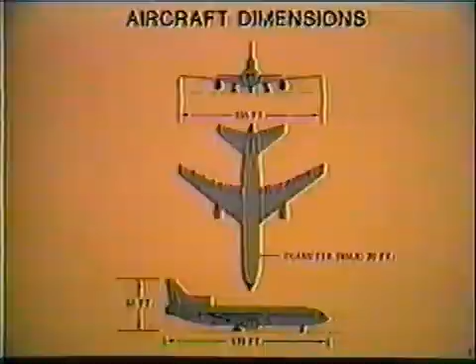The minimum pavement width for a 180-degree turn is 142 feet. This assumes the turn is being initiated with the airplane in motion at approximately idle thrust and no differential braking.

It should be noted that the wingtip turning radius is larger than the nose turning radius. Therefore, nose clearance does not ensure wingtip clearance. The tips of the wings are not visible from the flight station.

Due to the high velocity of engine exhaust, consideration must be given to power application in the terminal or ramp areas. Gale force winds of 50 miles per hour exist as much as 100 feet behind an idling engine. This point for a wing-mounted engine would be approximately 20 feet aft of the aircraft tail. For this reason, it is recommended that breakaway power be derived from the wing engines.

At takeoff thrust, wind velocity of 100 miles per hour exists at 300 feet aft of the tail and decreases to approximately 35 miles per hour as far aft as 1,100 feet.

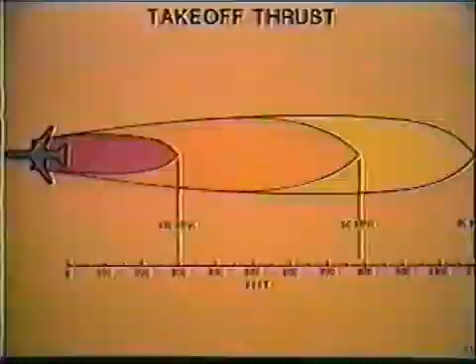The forward cargo compartment, the lower galley, the mid and aft cargo compartments are located in the area under the floor. The forward and mid cargo compartments are for containerized or bulk cargo. The aft cargo compartment is for bulk cargo and pets. All cargo compartments are Class D.

Located under the flight station is the forward avionics compartment, which is accessible in flight by a hatch in the flight station floor. The mid-avionics compartment is located in the center of the fuselage. It, too, is accessible in flight by a door located in the lower galley.

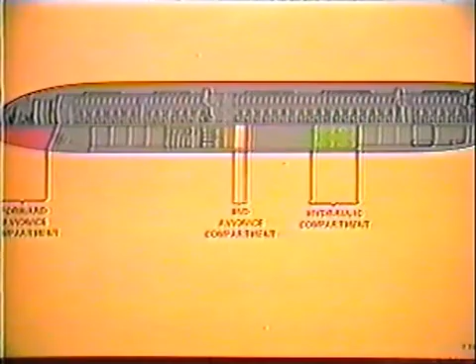The hydraulic compartment is located in the area between the main gear wheel wells. It is a non-pressurized area and is not accessible in flight. Access to the hydraulic compartment is through two doors on the underside of the fuselage.

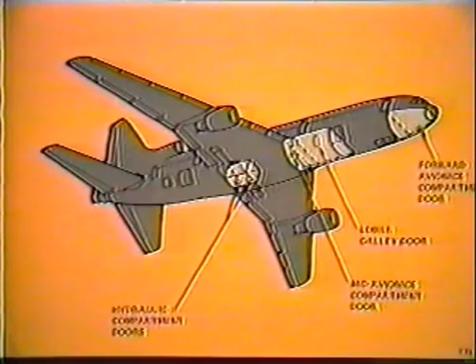The mid-avionics compartment external access door is under the right wing leading edge. The lower galley door is on the right side of the fuselage, forward of the right wing leading edge. The forward avionics compartment external access door is on the bottom of the fuselage, aft of the radome. This access door can only be opened from outside the aircraft.

All three cargo compartment access doors are on the right side of the aircraft. These doors are normally opened and closed electrically. If a cargo door actuator fails, the door may be manually cranked open or closed by use of a hand crank, stowed in the forward avionics compartment.

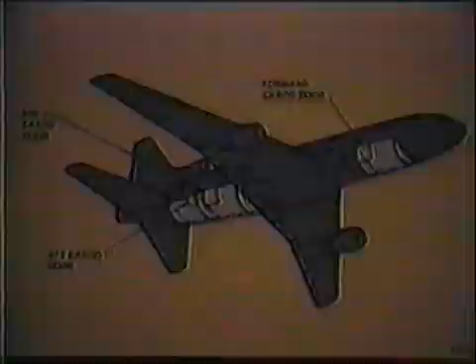Passenger doors are identified as 1 through 4, left and right. For example, the L1 door is the forward left entry door. The first 3 doors on each side are double-width entry doors. The L4 and R4 doors are single-width emergency doors only. They are all plug-type doors.

Flight station. The flight station is arranged in the conventional manner for a crew of 3 with 2 observers.

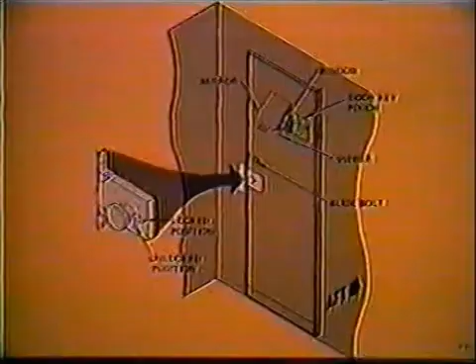The flight station door contains a window that is normally covered by a hinged mirror on the flight station side. Next to the mirror is a key pouch for the flight station door key. Below the mirror is a wide-angle viewer used to scan the cabin aft of the door.

A slide bolt is located above the doorknob for positive securing. The doorknob has a key lock on the cabin side and a manual lock lever on the flight station side. The manual lock lever prevents the knob from turning.

The door frame contains a lock plate that houses a solenoid-operated door latch release and a mechanical lock lever. The flight station door is normally held in the locked position by the energized solenoid. When the solenoid is de-energized, the door latch is released, allowing the door to open. The mechanical lock lever, when moved to the locked position, prevents the door latch from releasing.

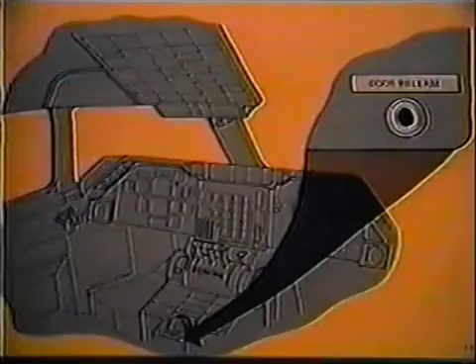On the aft right corner of the console is the momentary door release button, which de-energizes the solenoid, allowing the door to open.

Seats for 2 observers are provided in the flight station. The first observer's seat is elevated to provide the occupant with an over-the-shoulder view of pilot activity. Under his seat is stowage space for crew luggage with a retainer strap. Behind the seat is a coat closet.

The second observer's seat, adjacent to the entry door, has a folding seat bottom that stows when not in use. On the floor in front of the flight station door is a hatch which provides access to the forward avionics compartment. Fastened to the bottom of this hatch is the MCO pouch.

On the right aft portion of the flight station is a coat closet and a hat shelf. The floor of the coat closet is not to be used for storage, so no retaining straps have been provided. Forward of the coat closet and to the right of the second officer station is a flight kit storage area with a retaining strap.

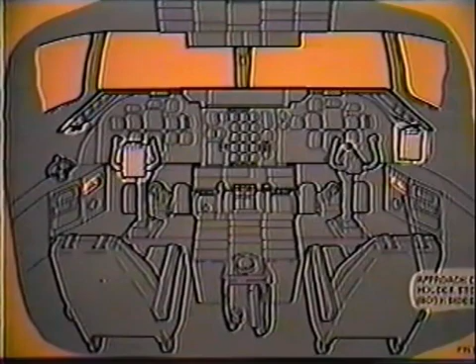Illuminated approach chart holders are stored in the side consoles and can be mounted either on the top of the control columns or on the side consoles.

An eye locator is provided to position the pilots for optimum visibility. With the pilot seat properly positioned, optimum runway visibility and an unobstructed view of the engine and flight instruments is assured. The pilot's eye locator is an illuminated two-way sight mounted below the compass on the windshield center post. The switch on the eyebrow panel controls the light in the eye locator. The eye locator will be demonstrated in the simulator.

With the pilot's position adjusted to the eye locator, forward visibility will be 28 degrees up and 21 degrees down. This means the first visible ground object will be 42 feet in front of the nose.

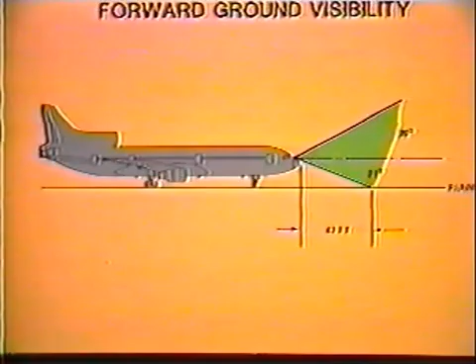On an ILS approach with a reported 1200 RVR at 100 feet, the first visible ground object will be 420 feet in front of the nose, resulting in 780 feet of ground visibility.

At touchdown, with a body angle of 8 degrees, the pilot's eye reference will be 32 feet above the ground. The nose wheel will be 10 feet off the ground, and the first visible ground object will be 130 feet in front of the nose.

During rollout and taxi, the pilot's eye reference is 19 feet above the ground and 22 feet forward of the nose gear. The nearest visible ground object will be 42 feet in front of the nose.

The captain and first officer seats operate identically. Vertical and longitudinal travel adjustments are normally electrically actuated. The same vertical and longitudinal adjustments have manual backup levers. 4 additional manual adjustments are provided: thigh adjustment, lumbar adjustment, recline adjustment, and the armrest adjustment. The seats will be demonstrated in the simulator.

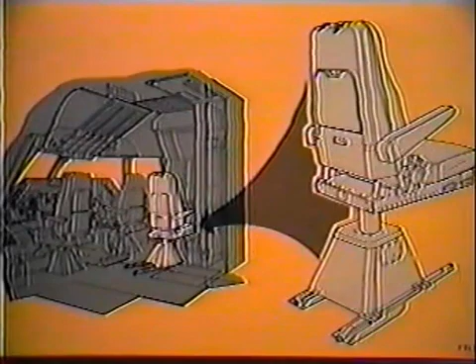The second officer's seat has manual controls and travels along the floor on diagonal tracks. The seat also swivels and has 5 stops. This seat will also be demonstrated in the simulator.

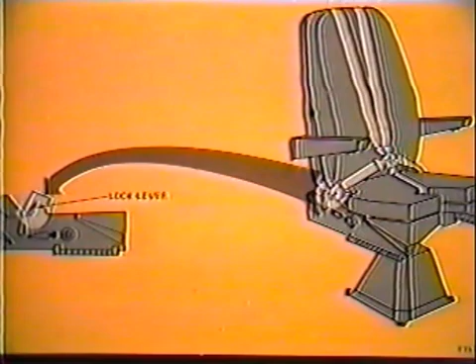All 3 crew member seats have the same restraint system. This consists of a dual shoulder harness with inertia reels, a lap belt with retractors that has lock levers to lock its position, and a crotch strap with retractor is also provided.

The circuit breaker panels are numbered from forward to aft. Circuit breaker panel 1 is over the pilots and is called CB1. Circuit breaker panel 2 is over the second officer and is called CB2. Circuit breaker panel 3 is to the right of the second officer's seat when he is facing the panel and is called CB3.

An alphanumeric grid reference is used to locate individual circuit breakers. Letters are along the right side of the panel, starting with A at the bottom. Numbers are along the bottom of the panel, from left to right, starting with 1. The circuit breaker panel number precedes the reference. For example, circuit breaker 1A7 would be circuit breaker panel 1, row A, column 7.

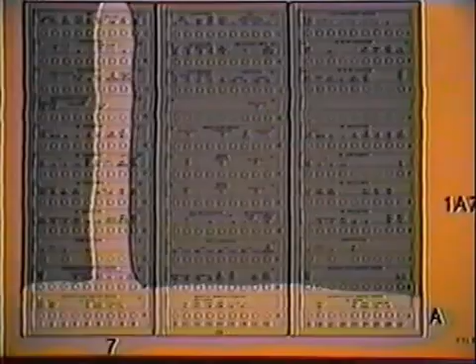Since circuit breaker panel 1 is within reach of both pilots, the left side contains the captain's flight instrument and avionics circuit breakers, and the right side contains the first officer's flight instrument and avionics circuit breakers. The center column contains circuit breakers pertinent to all 3 crew members.

Circuit breaker panel 2 contains those items less critical. The same alphanumeric grid reference is used to locate individual circuit breakers.

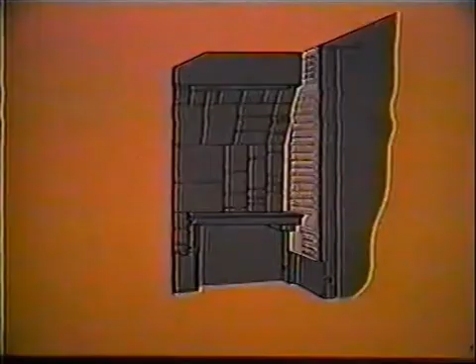Those items which must be readily accessible to the second officer are found on circuit breaker panel 3. Circuit breaker panel 3 also uses the alphanumeric grid reference system to locate individual circuit breakers.

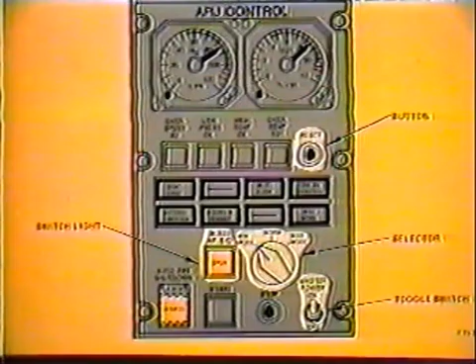Flight station panel switches. There are several different types of switches used on the L-1011. All of these different types can be seen on the APU panel. These types are button, selector, toggle switch, and switch light. The switch light may be new to you, so it will be explained.

A switch light assembly consists of a switch with a lens cap. The lens cap may display a maximum of 2 legends. The message may be either a word, a flow bar, or an in-transit indicator. A chrome bezel distinguishes a switch. A switch may be of the momentary or latching type. A black bezel distinguishes an indicator only. An indicator has no switch function.

Spare lamps are located in a drawer under the second officer's work table.

Two panels have guarded switches with cautions that must be observed when relamping. The cautions read, "Do not relamp with power on," or "Pull CB 1B14 before relamping."

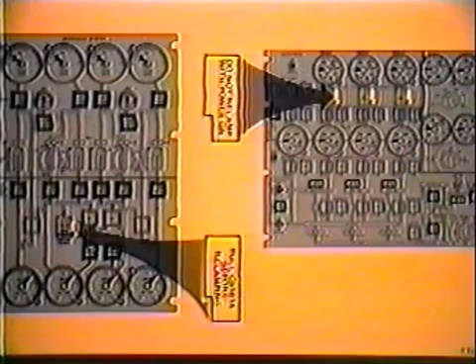When a malfunction occurs that is outside the normal vision of the pilot, a light on the pilot's annunciator panel will flash for 10 seconds, then remain on steady until the fault is corrected. The light from a fault not corrected can be extinguished by pressing the reset button.

An exception to this is the green Engine 2 fail-armed light. It is green because it is a normal condition not requiring crew action. It does not flash and will not reset.

The Warning Caution Advisory Light's test switch serves two functions. One is to test all the forward and overhead panel lights and the pilot's annunciator lights.

The second function is to recall any light on the pilot's annunciator panel which has previously reset and for which the fault has not been corrected. This light's test will automatically be terminated at the end of 5 minutes to protect the lights from overheating.

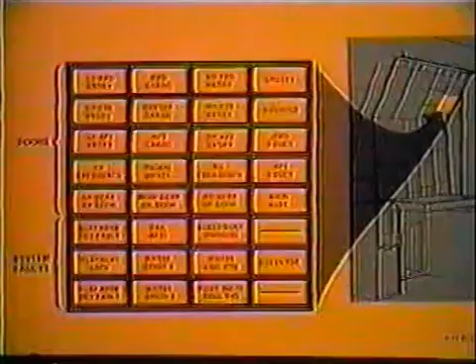The second officer's annunciators are somewhat different from the pilot's in that when activated, these lights illuminate steady and will remain illuminated until the associated door is closed and locked, or the affected system fault is cleared.

The upper portion of the second officer's annunciator panel indicates door lock status. The lower portion indicates system faults.

There are a number of aural warnings. Each of these warnings will be covered in their respective sections later in the program.

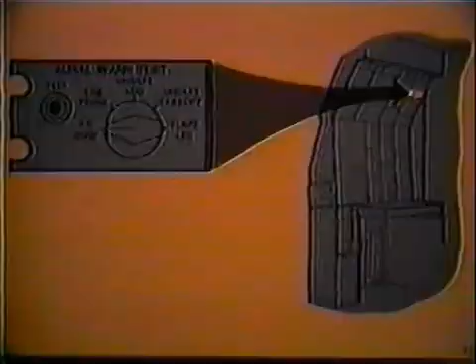An aural warning test panel, located at the second officer's panel, permits testing of certain aural warning sounds. It does not test the system or equipment. When the test button is pressed and held, it will sound the aural warning for the system selected.

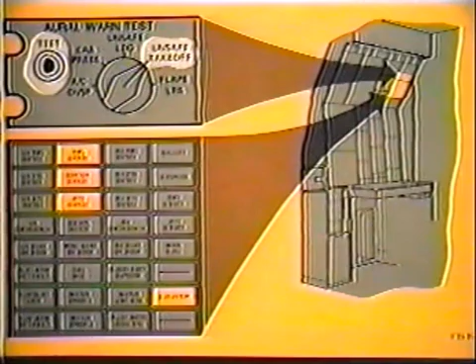The unsafe takeoff position is unique, since it also tests the cargo door open and elevator light circuits for integrity. When selected to unsafe takeoff, pressing the test button will cause the 3 cargo door open lights to illuminate, the elevator light to illuminate, and the unsafe takeoff aural warning to sound.

This confirms the system's ability to annunciate if a cargo door was unlocked or open, or if an elevator is jammed. The aural warning sounds as a result of the test only, and will not sound with an actual cargo door open condition. The aural warning will sound with an actual unsafe takeoff condition.

The aircraft has 3 categories of aircraft lighting. Normal interior and exterior lighting is powered from the main aircraft load buses. Instrument standby lighting is powered from the standby bus.

Cabin and cockpit emergency lighting is powered by separate battery packs located throughout the cabin and galley.

The captain and first officer's glare shield, utility, instrument, and floodlight controls are at each side of their instrument panel. The center console backlighting and engine instrument panel lighting controls are located below the parking brake knob. The individual cockpit lighting controls will be demonstrated in the simulator.

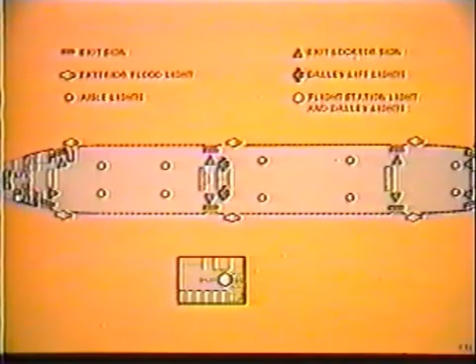Exterior lights. The exterior lights panel is located on the eyebrow panel and contains all the controls for the exterior lights.

There are 8 position lights installed on the wingtips, 4 on each side. The aft position lights are white. The 2 left position lights are red, and the 2 right position lights are green. When the position light switch is latched, 6 of the 8 position lights are illuminated.

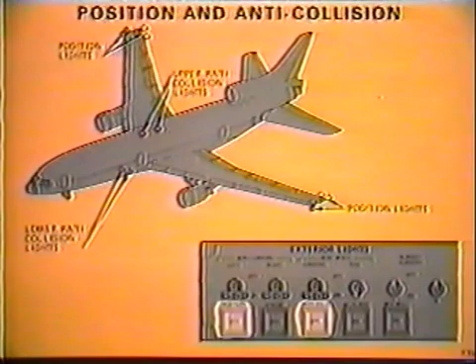The remaining upper red and green position lights will be illuminated when the anti-collision switch is latched. 2 anti-collision lights are located on the top of the fuselage and 2 on the bottom. Strobe lights are located on the leading and trailing edges of each wingtip.

1 fixed position landing light is installed in the leading edge of each wing fuselage fillet. There are 2 fixed position lights on the nose gear that serve as high-intensity landing lights and lower-intensity taxi lights. Runway turn-off lights for side vision are also installed in the wing fuselage fillet directly above the landing lights.

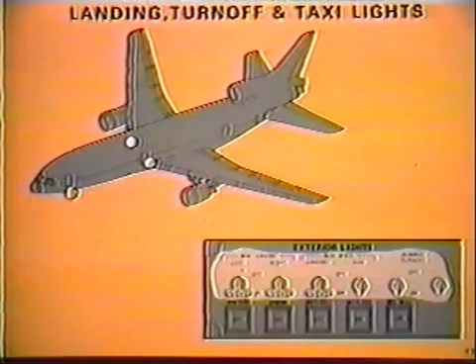Wing floodlights are placed on each forward side of the fuselage to illuminate the wing leading edge and engine areas. Wheel well lights are located at each main landing gear and the nose gear.

Let's take a quick look at the passenger cabin. 2 aisles run the full length of the cabin and are intersected by 4 cross aisles, 1 at each door.

Flight attendant control panels are located at the L1 and L4 doors. They contain the lighting, PA, entertainment, and electrical controls for the cabin.

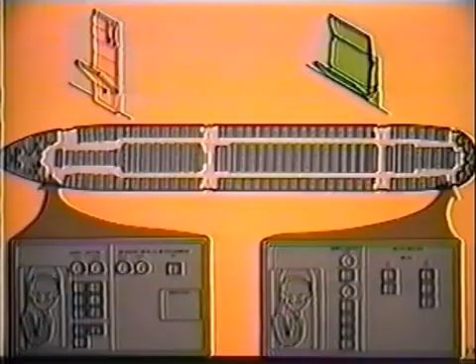There are 7 lavatories, 2 forward and 5 aft in the passenger cabin. In the center of the cabin is the upper galley, shown in amber.

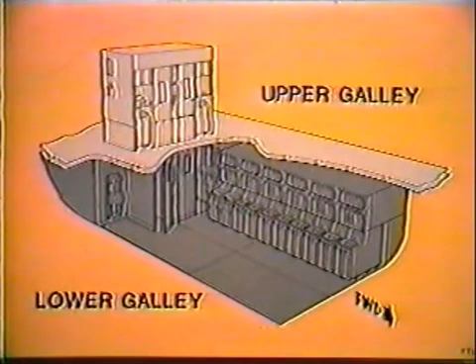The upper galley contains 2 lifts for access between the upper and lower galley. The lower galley is complete with refrigerators, ovens, and storage facilities for all meal and beverage carts.

This is a view of the lower galley looking aft. Above each folding attendant seat is a galley circuit breaker panel.

Items found on these panels are basically for cabin and galley equipment. The seat on the left lifts up, providing in-flight access to the mid-avionics compartment.

Two galley lifts provide accessibility between the lower and upper galleys. They are fully independent and may be operated simultaneously. Each lift may transport either one service cart or one attendant in either direction.

Internal controls are provided inside each lift. The external directional control switches are located on panels between the enclosures at both the upper and lower galley levels.

The upper galley control panel has a key switch to power both lifts, power either one, or remove all power. The key is located in the upper galley storage compartment.

To operate the lift from the inside of the lift, make sure the lift door is shut and latched. Place both hands, one on each assist handle. Place thumbs on the toggle switches above each handle and press and hold both switches simultaneously in the desired direction until the lift comes to a complete stop.

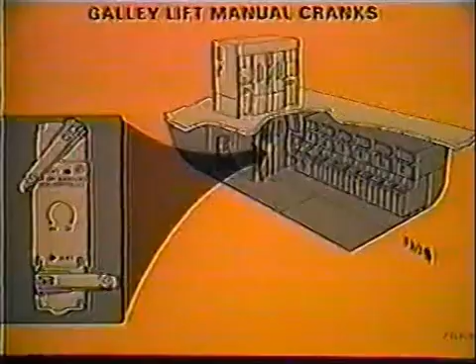Hand cranks are located below the lower galley lift control panel to provide a manual means of raising or lowering the lifts.

Waste system. The wastewater panel is located on the second officer's lower instrument panel. It contains the waste pump indicator lights. The wastewater panel also contains the drain mast heater switches, which will be discussed in the ice and rain protection section.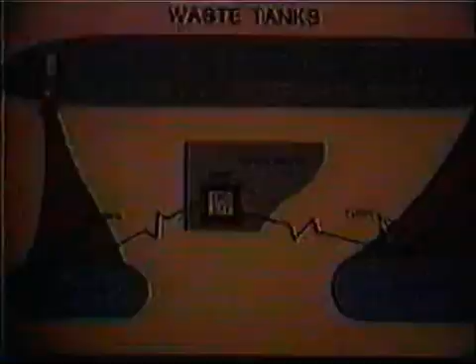There are 2 toilet waste tank systems. The forward system provides waste holding and flushing capabilities for the 2 forward toilets. The aft system also provides waste holding and flushing for the 5 aft toilets and consequently has a larger storage tank. Except for the tank capacity, the systems are identical.

Each system has 3 flushing pumps, which alternately respond to flush signals. If a pump should fail to flush a toilet when signaled, the controller will drop that pump from its sequence and illuminate the appropriate forward or aft wastewater pump light. The next pump in sequence, if available, will be signaled to operate.

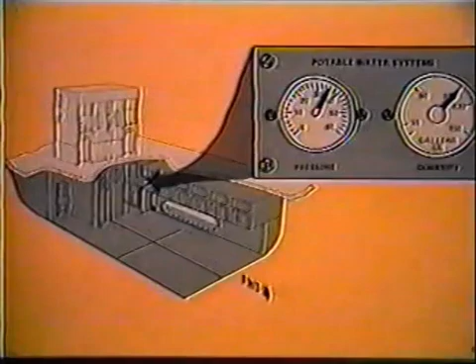Water system. A 150-gallon water tank is located outboard of the lower galley on the left side. When fully serviced, the tank will contain 100 gallons of water. The remaining 50-gallon volume is used for charge air pressure.

2 air compressors pressurize the tank to approximately 35 psi. Both pressure and quantity are indicated on the potable water system panel located next to the lower galley sink.

Two compressors pressurize the water tank. Water then flows forward and aft through individual shutoff valves located directly under the water tank. Additional water shutoff valves are located in the galley lift shaft and at each service center and lavatory. If either water compressor fails, the remaining compressor will continue to pressurize the tank.

The water distribution lines are protected from freezing by dual-element water line heaters in the unheated areas. If one of the heater elements in the water line heaters fail, the other heater element will continue to provide adequate heat.

Lights associated with the water system are the 2 water compressor lights and the water line heater light on the second officer's annunciator panel. If either water compressor fails, its respective legend will illuminate. If one of the dual-element water line heaters fail, the water line heater light will illuminate.

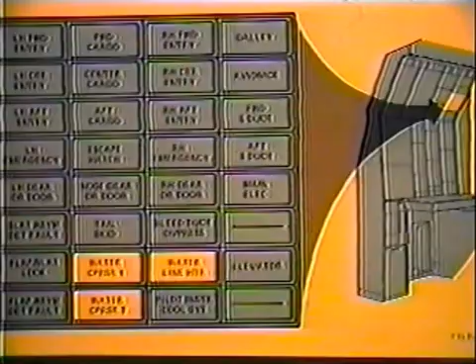The L1011-500 differences will be taught following each subject in which differences do occur. -100, -200 differences for ship number 724 will also be covered when necessary. If nothing is said at the end of a subject, assume both types of airplane, the -100, -200, and the -500, to be the same as the basic -1 airplane.

-500 airplane general differences.

The maximum weights for ship 724 when it is being operated as a -100 airplane are: taxi, 468,000 pounds; takeoff, 466,000 pounds, international operations; 430,000 pounds for domestic operations; landing, 368,000 pounds; zero fuel, 338,000 pounds, subject to certain conditions found in the limitations section of the pilot's operating manual. Fuel capacity, approximately 179,000 pounds.

The maximum weights for ship 724 when it's being operated as a -200 airplane are: taxi, 476,000 pounds; takeoff, 474,000 pounds, international operations; 430,000 pounds, domestic operations; landing, 368,000 pounds; zero fuel, 338,000 pounds, subject again to certain conditions found in the limitations section of the pilot's operating manual. Fuel capacity, approximately 179,000 pounds.

The maximum weights for the -500 aircraft are: taxi, 512,000 pounds; takeoff, 510,000 pounds, international operations; takeoff, 430,000 pounds, domestic operations; landing, 368,000 pounds; zero fuel, 338,000 pounds. Fuel capacity, approximately 212,000 pounds.

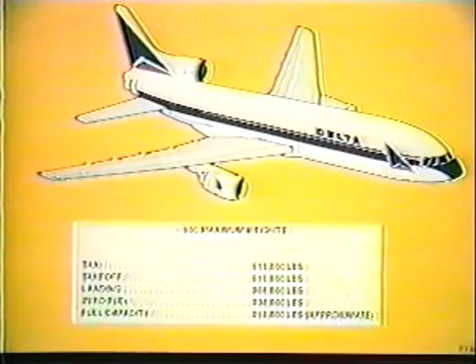The basic fuselage differences of the -500 from the basic -1, -100, -200 aircraft are: the fuselage is shorter. The -500 has only 3 sets of entry doors. The underfloor galley is removed, and the forward cargo door is much larger.

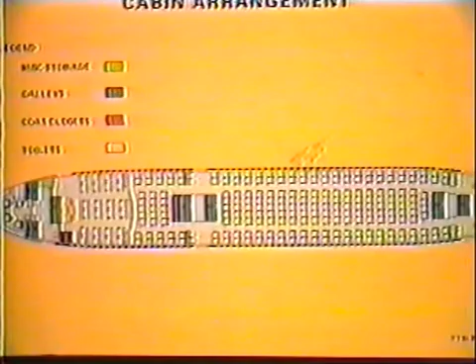Since there is no underfloor galley, 3 galley complexes are located in the passenger cabin. One is located at the number 1 door area, a second one at the number 2 door cross aisle, and a third located in the rear cabin number 3 cross aisle. The lavatories are located in approximately the same place in the forward and rear cabin.

The Dash 500 aircraft has 10 flight attendant jump seats, 4 at the number 1 door cross aisle, 4 at the number 2 door cross aisle, and 2 at the number 3 door cross aisle.

The potable water tank on the Dash 500 aircraft is located near the aft cargo compartment. The quantity and pressure gauges are located on the water service panel on the outside of the airplane below the number 2 right door. This is the same location as it is on the Dash 1 aircraft.

The flight attendants on this airplane do not have water quantity and pressure gauges inside the airplane. Consequently, the second officer must check these indications on walk-around.

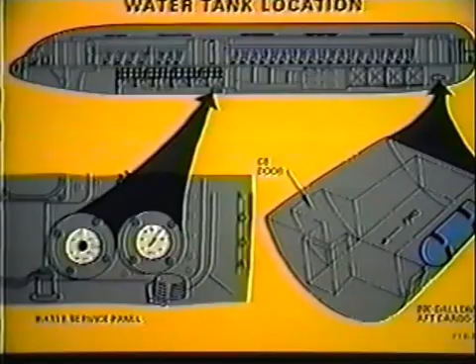The Dash 500 has only 3 pairs of entry doors. All 6 of these doors work just like the forward 6 doors on the Dash 1 aircraft. The forward cargo door is approximately 50% larger and is generally referred to as the C1A cargo door.

The C1A cargo door is normally electrically operated. It can also be hand cranked. 2 cargo door warning lights, a forward cargo forward lock light, and a forward cargo aft lock light are installed on the second officer's annunciator panel. They indicate the status of 2 of the 8 door locks.

A visual check of the 8 door locks can be made through 8 viewing ports on the bottom edge of the door. The 2 rear cargo doors on the Dash 500 aircraft and all 3 cargo doors on all other L-1011s have viewports installed on the top edge of the cargo door. This viewport, or window, is to be used to visually determine cargo door lock status in the event the cargo door warning light does not extinguish when the door is closed.

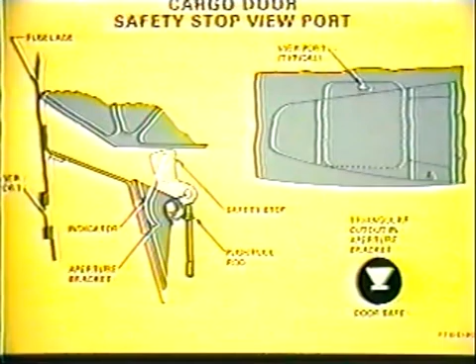This concludes Aircraft General.

The pneumatic system. The pneumatic system control panel is located at the center of the second officer's upper panel.

The control switches and pneumatic system schematic appear on the panel as shown. Consider the engines to be at the top of the panel, supplying pneumatic pressure to the 3 separate bleed channels down the panel.

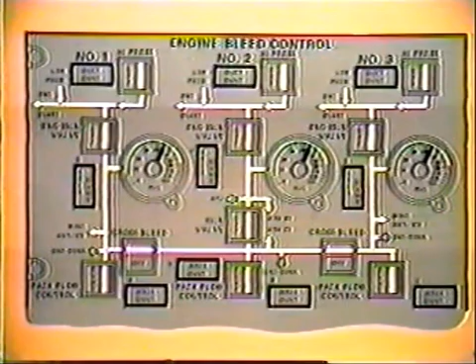The 3 channels can be paralleled into a common cross-bleed manifold or isolated from one another by use of the cross-bleed valve switches.

Each engine supplies low-pressure bleed air from the N2 compressor for the pneumatic system. This low-pressure bleed air is the primary supply for operation of the pneumatic system.

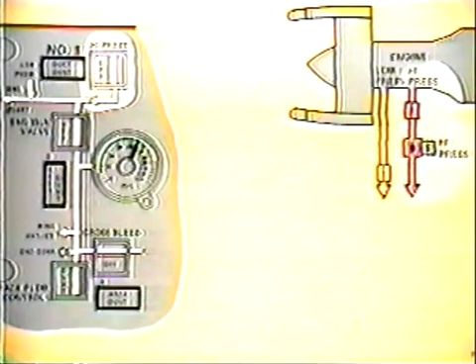The N3 compressor provides high-pressure bleed air to supplement the low-pressure bleed air when necessary to meet pneumatic system demands. This air is controlled by a high-pressure bleed valve.

Located just above the engine isolation valve is an ejector that mixes high-pressure bleed air and the low-pressure bleed air to satisfy pneumatic system requirements.

High-pressure air will be mixed with low-pressure air at low engine power settings. High-pressure air will also be added to supply a higher temperature when using wing anti-icing.

The engine isolation valve, when open, will regulate pressure to approximately 40 psi. When the valve is closed, all pneumatic pressure from that engine is shut off.

The high-pressure and engine isolation valves may be manually controlled using these switch lights on the pneumatic panel. With these switch lights latched, both the high pressure and the engine isolation valves are electrically de-energized and armed to open automatically with pneumatic pressure.

The engine isolation valve will open when low pressure air is available. The high pressure valve will open when high pressure air is available and the pneumatic system demand requires additional air pressure or a higher temperature.

The high pressure valve will close any time that the engine isolation valve closes for any reason. The flow bars on these switch lights will illuminate any time the respective valve is open.

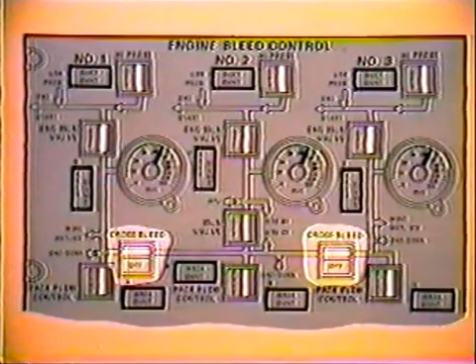The three bleed channels may be interconnected or isolated through the use of cross-bleed valves that are controlled with these cross-bleed switch lights. When the switch lights are latched in, the valves will open when pressure is available on either side of the valve. The flow bar will illuminate when the respective valve is open.

The remaining valve in the pneumatic system is the aft fuselage isolation valve. Its primary function is to provide the capability to isolate portions of the manifold so that a leak in one area would not necessarily cause a loss of pneumatic pressure to both air turbine motors.

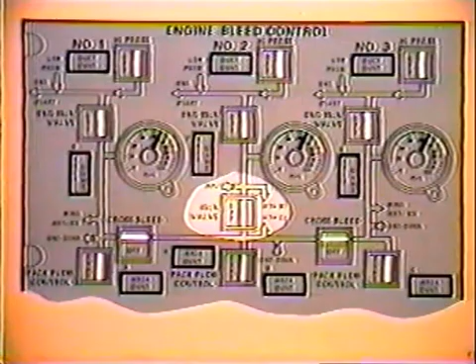Pneumatic pressure supplied by the APU is introduced into the system as shown here. It can be monitored on the number 2 bleed channel pressure indicator any time that the APU bleed air shutoff valve is open. APU pneumatic pressure will also be indicated on the number 1 or number 3 pressure gauges if the appropriate valves are open. Caution: do not mix APU pneumatic pressure with any other air source.

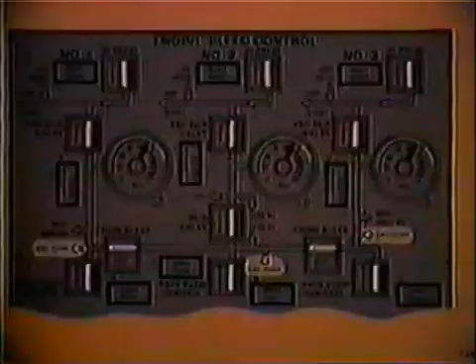Air can be supplied from one or more external pneumatic connections. These connections are indicated by the arrows on the panel. A single channel or the entire manifold may be pressurized depending upon the position of the cross-bleed valves and fuselage isolation valve. Do not mix external pneumatic pressure with any other air source.

The major items supplied by the pneumatic system are all 3 engine starters, wing anti-ice, both air turbine motors, and the 3 air conditioning packs.

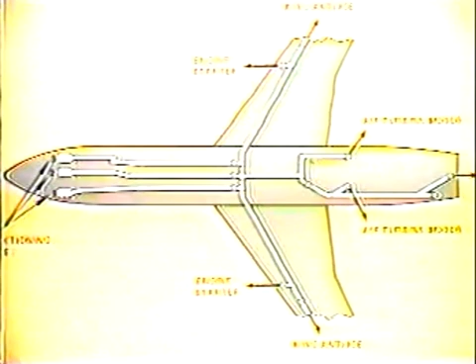These pneumatic subsystems are depicted on the panel. Starting from the top of the panel, they are the engine starters, wing anti-ice, air turbine motors, and the air conditioning packs.

The pneumatic system is provided with several protective functions. Some of these will provide indication only, while some others will take protective action.

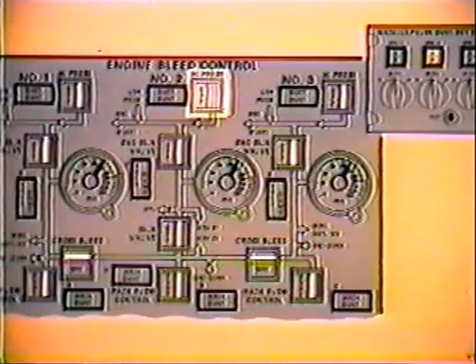The nacelle pylon overheat detection system is designed to detect excessive temperature around the outside of the pneumatic ducting in the nacelle or pylon areas. The high temperature condition could be caused by a leaking high pressure pneumatic duct. This protective system will close and lock the high pressure valve for the appropriate engine.

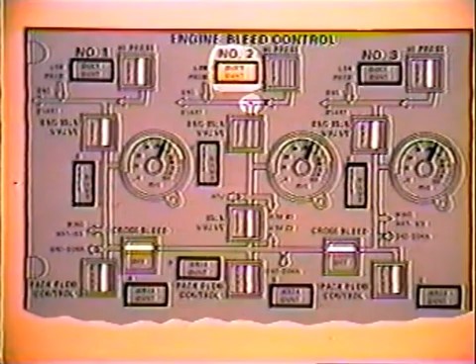The duct overheat system is designed to provide protection in the event of excessive bleed air temperature inside the duct, just above the engine isolation valve. The protective action will be the closing of the high pressure and engine isolation valves. These valves will be locked closed until the duct overheat light extinguishes and the valve switch lights are unlatched and relatched.

There is an overpressure valve located just downstream of each engine isolation valve. The respective valve will close if excessive pressure is sensed in the pneumatic ducting. When the overpressure valve closes, it will cause the engine isolation valve for that channel to lock closed, and the bleed duct overpressure light on the second officer's annunciator panel will also illuminate.

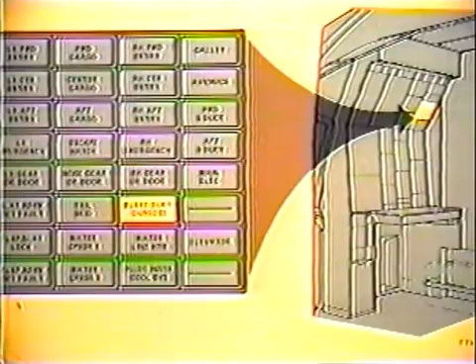The overpressure valve will reopen when the pressure decreases. When the engine isolation valve switch is unlatched, the bleed duct overpressure light will extinguish. The engine isolation valve will reopen if the switch is latched back in.

The high pressure valve is not locked closed by the overpressure condition, but the high pressure valve switch light may have to be unlatched if the overpressure occurs again.

There are area overheat lights on the pneumatic panel. These lights provide an indication of excessive temperature around the outside of the pneumatic ducting.

The area overheat detection system is a dual-loop detector system. If either loop senses an overheat, such as a leaking pneumatic duct or a shorted detector loop, the affected area overheat light will illuminate. It will also illuminate during a test of the area overheat detection system.

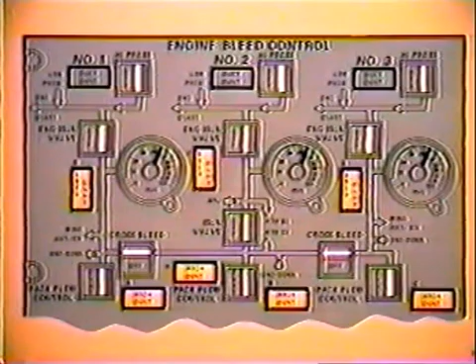The area overheat lights are located on the panel adjacent to the ducting they monitor. The upper three lights on the pneumatic panel monitor the ducting from the number 1, 2, and 3 engines. The left and right lights, identified as D and E, monitor the number 1 and 3 engine ducting. The center light, identified as J, monitors the number 2 engine ducting.

The cross-bleed manifold is monitored by the lower light on the pneumatic panel and is identified as H. The lower 3 lights monitor the ducting from the center section forward to the air conditioning packs and are identified as A, B, and C.

The ducting to the wing anti-ice system from the pylons outboard are also monitored by the area overheat detection system. The anti-ice duct fail lights located on the overhead switch panel, identified as F and G, monitor this ducting.

These letters are intended as an aid in choosing the proper procedure to be followed and for proper identification of the affected area for maintenance use later.

If an overheat rupture occurs anywhere in the D area, the number 1 engine ducting, the E area, the number 3 engine ducting, or the H area, the cross-bleed manifold, valves will automatically close to isolate that individual channel. For instance, if a rupture occurs in the number 1 engine channel, the D area, the number 1 engine isolation valve, the left cross-bleed valve, and the number 1 pack flow control valve will automatically close.

The associated area overheat light will also illuminate. If a reset of these valves is required, all 3 switch lights must be unlatched before any valve can be reopened, after the affected area overheat light has extinguished.

If a leak is detected around the outside of the cross-bleed manifold, the H area, both cross-bleed valves, the fuselage isolation valve, and the number 2 pack flow control valve will automatically close. The associated area overheat light will also illuminate.

If a reset of these valves is required, all 4 associated switch lights must be unlatched before any valve can be reopened, only after the area overheat light has extinguished.

If the number 3 engine channel, the E area, is affected, the number 3 engine isolation valve, the right cross-bleed valve, and the number 3 pack flow control valve will automatically close. The associated area overheat light will also illuminate.

In this case, all 3 switch lights in the affected system must be unlatched before any valve can be reopened, after the affected area overheat light has been extinguished.

An inhibit circuit is built into the D, the E, and the H detection systems to prevent a total pneumatic lockout, an all-valves-closed condition.

If, for instance, a rupture occurred anywhere in the number 3 engine channel, the E detection system would automatically close those affected valves. If, in the remote possibility, an overheat occurred in either the D and/or the H areas, the D and H detectors cannot automatically close those remaining valves until the first overheat had cooled and its light extinguished, thus preventing a total pneumatic lockout.

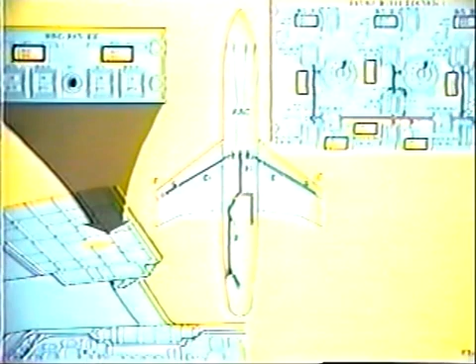In summary, 3 of the 9 areas will automatically close valves. They are the number 1 channel, the D area, the number 3 channel, the E area, and the cross-bleed manifold, the H area. These will automatically lock valves closed in their respective channels.

The remaining 6 channels, however, do not close valves. They provide light indications only. They are the number 2 channel, the J area, the 3 air conditioning channels, the A, B, and C areas, and the wing anti-ice ducting, the F and G areas.

Dash 500 pneumatic differences. If either or both air turbine motors have a run signal and the pneumatic duct pressure drops below approximately 15 psi, the number 2 pack flow control valve will automatically close. When the duct pressure again rises, or both ATMs lose their run signal, the number 2 pack valve will automatically reopen.

This concludes the pneumatics section.

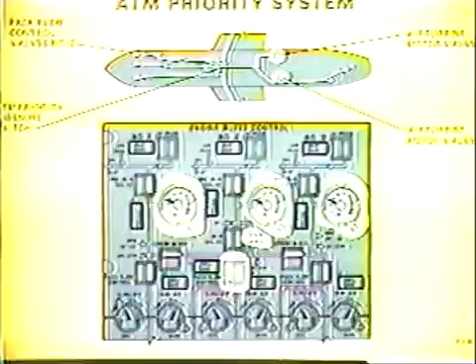Ice and rain protection. During the ice and rain protection program, we will discuss the following subsystems: ice detection, wing anti-ice, engine anti-ice, air data sensor heat, windshield heat and defogging, windshield washer and wipers, rain repellent, and drain mast heat.

Ice detection. The ice detector probe, located on the underside of the aircraft nose, senses ice buildup and illuminates the icing light on the pilot's annunciator panel. The icing light remains on a minimum of 1 minute, or as long as icing conditions exist.

Wing anti-ice. The wing anti-ice control panel is located on the pilot's overhead panel. It contains both automatic and manual controls for wing anti-ice.

Air for the wing anti-ice system is available from the left and right ends of the pneumatic crossbleed manifold. The wing anti-ice valves are electrically controlled and require pneumatic pressure to open. The points at which pneumatic pressure is available for wing anti-ice are depicted here on the pneumatic panel. Note that the left and right ends of the crossbleed manifold must be pressurized for anti-icing to be used on both wings.

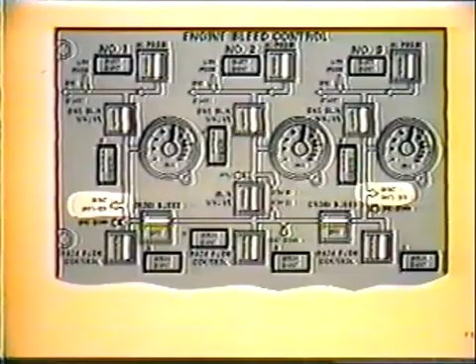There are 2 modes of wing anti-ice operation, auto and manual. With the auto switch latched, on is illuminated, and the wing anti-ice valve is energized to open with bleed air pressure. When the valve does open, the open light will illuminate in the bottom half of the manual switch. The hot air then flows through the inside of the leading edge slats and is vented overboard. The anti-ice valve will modulate to control the temperature to a specified value.

With the manual switch latched, on is illuminated and the wing anti-ice valve is electrically armed and will open when pneumatic pressure is available. The open light illuminates when the valve is open. The valve will remain open in the manual mode regardless of the temperature in the slats.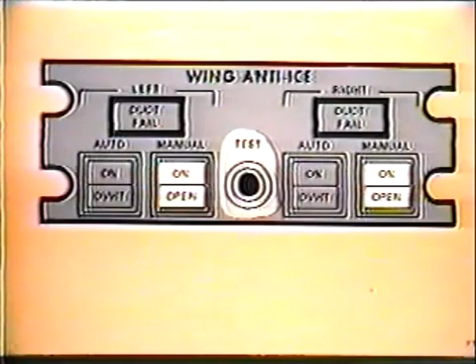The wing anti-ice valves are normally inhibited from opening on the ground by the air-ground sensing system. The test button shown here provides the capability of testing the system while on the ground. When either the automatic or the manual switches are latched and air pressure is available at the individual valves, the open lights will illuminate as the valves open.

The overheat light indicates excessive slat temperature when either the auto or manual mode is in use. The overheat system will not close the anti-ice valve. The switch would have to be unlatched.

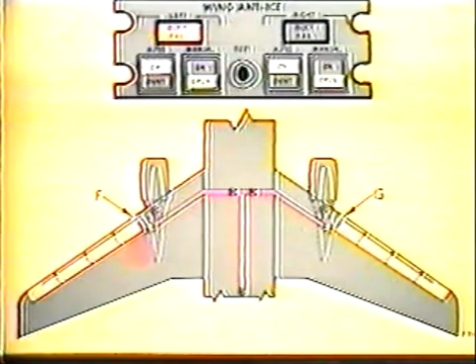The duct fail lights will illuminate to indicate that the temperature in the area around the outside of the wing anti-ice ducting is excessive. A probable cause is a leaking duct. These lights are a part of the area overheat system and are designated as areas F and G.

When a duct fail light illuminates, the area overheat test button and selector switch on the second officer's air conditioning panel are used to determine whether or not the light was illuminated by both overheat detector loops or by one loop only. The area duct overheat light on the pilot's annunciator panel will also illuminate.

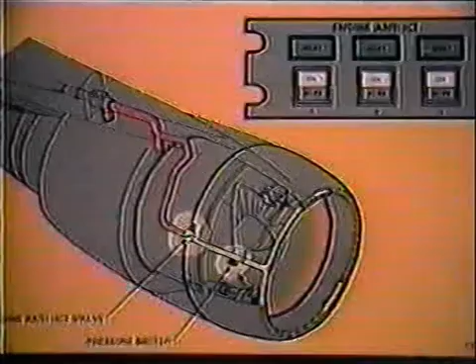Engine anti-ice. The engine anti-ice control panel is located on the pilot's overhead panel. Each engine provides its own low-pressure bleed air for anti-icing. When the engine anti-ice switch is latched, the on light will illuminate to indicate switch position.

The green heat light indicates that there is sufficient pressure in the system. The heat light may not illuminate at ground idle, but should come on as RPM is increased. The heated areas are the nose cowl inlet lip and the EPR probe.

Each engine has a high-pressure relief valve protecting the nose cowl against overpressure. Should the nose cowl pressure increase above normal, the high-pressure light on the engine anti-ice panel will illuminate. The relief valve will vent the excess pressure overboard.

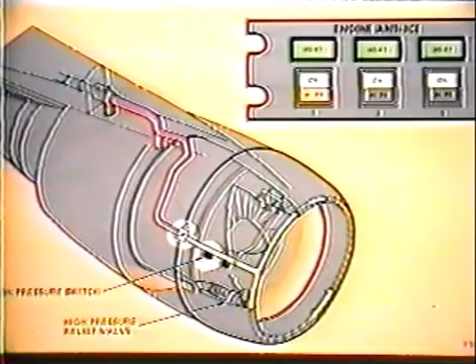Air data sensor heat. The air data sensor heat control panel is located on the pilot's overhead panel.

The pitot-static probes, total air temperature probes, and angle of attack probes on the nose of the aircraft are provided with anti-ice protection.

There is a captain and first officer pitot heat switch on the air data sensor heat panel. When the captain's switch is latched, heat is applied to a left and a right pitot-static probe. The first officer switch also applies heat to a left and a right probe.

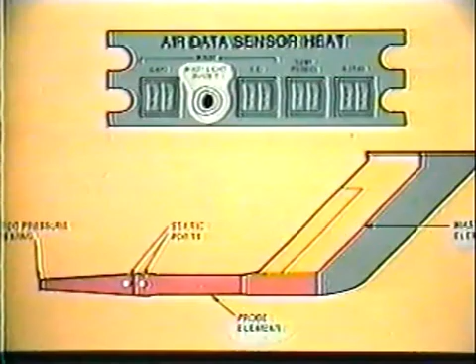Each pitot-static probe has two heaters, one in the probe and one in the mast. Illumination of any of the four off lights indicates that one of the heater elements has failed. The mast light inhibit button is provided to aid in determining which heater has failed.

When the mast light inhibit button is pressed, it inhibits the mast element signal. Therefore, if the mast element has failed, the off legend will extinguish. If the off legend remains illuminated, the probe element has failed. In the example shown here, the probe element has failed, so the off light would remain illuminated with the inhibit button pressed.

Failure of a probe heater in icing conditions could affect pitot and static sensing. A mast heater failure would be of less concern.

There are two total air temperature probes. Each probe contains a single heating element. Each off legend represents a probe. Normally, the switch is latched and dark. When the anti-ice element fails in a temperature probe, the off legend will illuminate. The indication shown here is a heater failure for the left temperature probe.

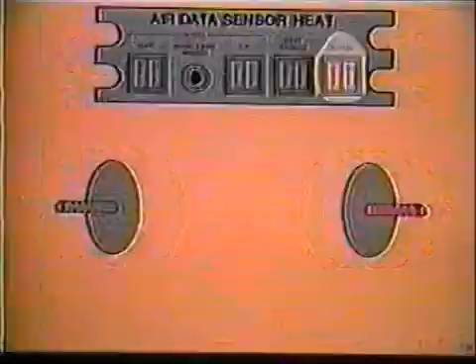When the alpha heat switch is latched, the heaters are operating for the left and right alpha probes. Due to the design of the system, the heaters must reach a specified temperature before the off lights will extinguish in the alpha heat switch. Therefore, it is normal for the off lights to remain illuminated for a short period of time after the switch is latched, and to remain extinguished for a short time when the switch is unlatched. The indication shown here is a failure of the left alpha heater.

Windshield heat and defog.

The windshield heat control panel is located on the pilot's overhead panel. With the captain's or first officer's windshield heat switch unlatched, the idle legend is illuminated. Low temperature heat is being applied to the captain's and first officer's windshield. High heat is applied to the captain's and first officer's forward windshield when the switches are latched and dark.

The side windows operate at one temperature. Normally, the switches are latched and dark. Fault lights indicate a malfunction of the windshield heat system.

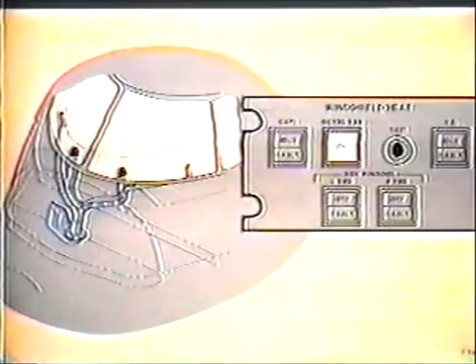The windshield defog fan circulates flight station air onto the windshields. Because of a considerable air blast with this fan, it is advisable to guard the eyes before latching the switch. It may raise some dust.

Windshield washer and wipers.

Both the captain and first officer have windshield wiper control panels located in the pilot's overhead panel. However, only the captain's panel contains a washer switch light. The washer switch, when pressed, pressurizes the windshield washer system and illuminates the pump on light. Pressing the switch again turns off the pump and extinguishes the pump on light.

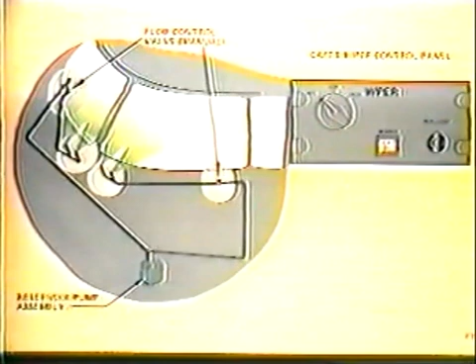A combination reservoir pump is located in the forward avionic compartment. The reservoir holds approximately 1 gallon of fluid, which is routed from the reservoir pump through a manually controlled flow control valve for each windshield to the spray nozzles.

A windshield washer flow control valve is located at each pilot's side console. These valves provide selective fluid flow to each windshield after the pump has been turned on at the captain's wiper panel.

The windshield wiper control is a 3-position selector that turns on and controls the speed of the captain's windshield wiper. The first officer has an identical control for his windshield.

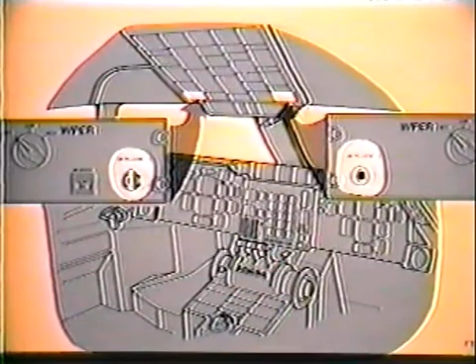The rain repellent switches are on the windshield wiper control panels. Pressure for the rain repellent system comes from a pressurized can located at the aft end of the captain's side console.

Actuation of the repellent switch ejects a measured amount of fluid onto that windshield. If more fluid is desired, press the repellent switch again. Holding the repellent switch will not create a continuous flow of fluid.

Depending upon airspeed and rain conditions, each actuation should be adequate for 2 to 5 minutes. Approximately 75 applications are available in a fully charged repellent container. Rain repellent should only be applied in heavy rain with the windshield wipers on, and should be applied to only one windshield at a time.

The rain repellent pressure gauge has a red and green arc. There is also a refill sight gauge below the pressure gauge. If the pressure gauge indicates in the red, or the refill float is in view, the system requires servicing.

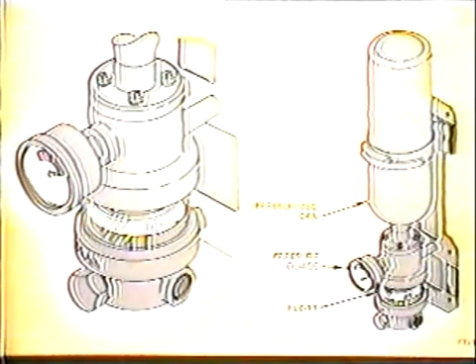Two wastewater drain masts are located on the underside of the fuselage to drain the galley and lavatory sinks. Each drain mast contains 2 heating elements. The masts are heated to a rather high temperature and are labeled hot, do not touch. The wastewater panel is located on the second officer's panel.

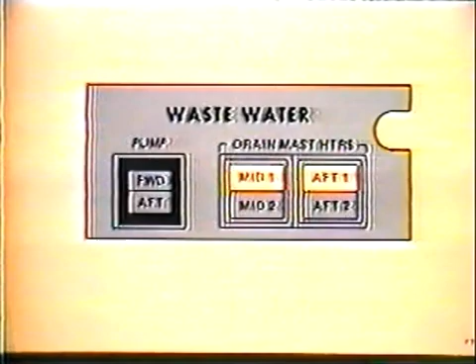The drain mast heater switches are normally latched. The number 1 heating elements are on and the number 2 heating elements are off. In the event of a failure, the number 1 legend will illuminate. Unlatching the drain mast heater switches will extinguish the number 1 legend and power the number 2 heating element. In the event of a number 2 heater failure, the number 2 legend will illuminate.

This concludes ice and rain protection.

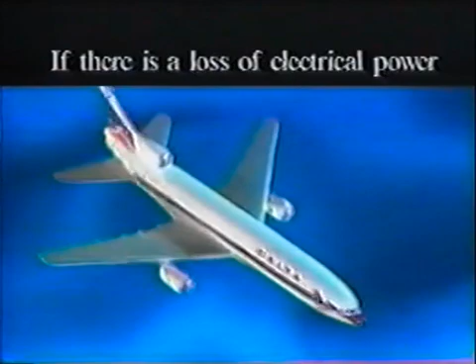Exits on the L-1011 are 8 doors, 4 on each side of the aircraft. If there is a loss of electrical power, emergency track lighting installed near the floor will illuminate. White lights lead to red lights, which indicate the exit. Please take a moment to look around and locate the exit nearest your seat.

And be aware, your closest exit may be behind you. A portion of this flight will be over water, so we'd like to acquaint you with the location and use of flotation equipment. A life vest is located in a pouch beside or under your seat.

Remove the vest from the pouch by pulling on the tab. Place the vest over your head and fasten the straps to the front of the vest. Adjust the straps loosely around your waist.

For a small child, pull the vest over the child's head, with the back piece fully extended. Bring the straps up between the child's legs and clip in front. Tie the excess straps loosely around the waist.

Do not inflate the vest inside the aircraft. As you leave the aircraft, pull down on the red tabs to inflate the vest. The vest can also be inflated by blowing into the tubes on either side. For a small child, inflate one chamber of the vest upon leaving the aircraft. For an infant, partially inflate the vest using one oral inflation tube. Lay the infant on the vest and secure with the straps.